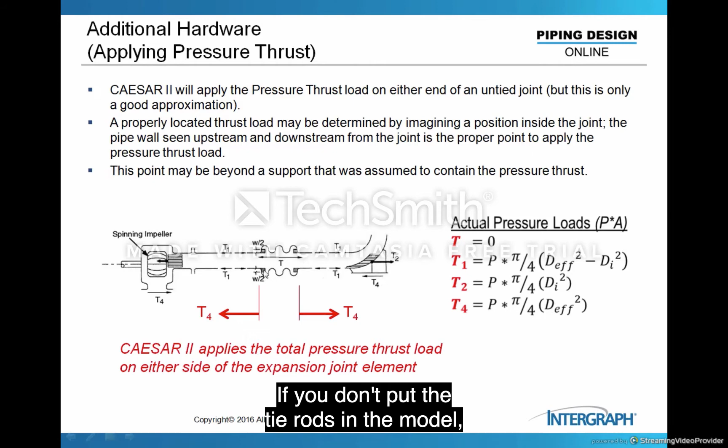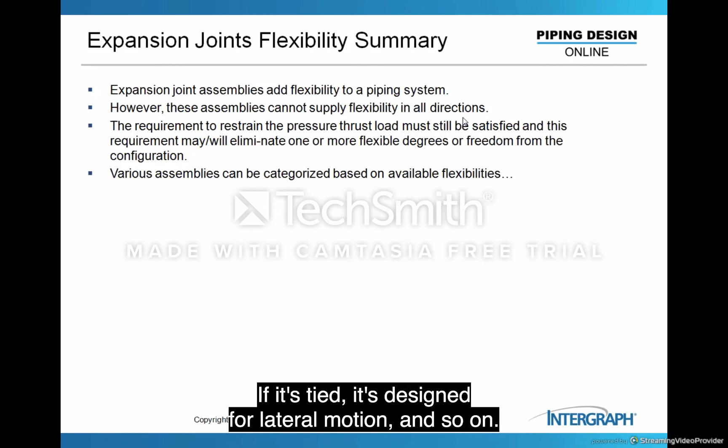Now, just to summarize, these expansion joints are added to your piping system to add flexibility, probably for thermal strain or maybe some anchor motion. Sometimes it's maybe a little bit of alignment issues too, but basically they're used to add flexibility to the piping system. Now, these assemblies do not work in all directions though. You noted earlier that I said that if it's untied, it is designed for axial motion. If it's tied, it's designed for lateral motion, and so on.

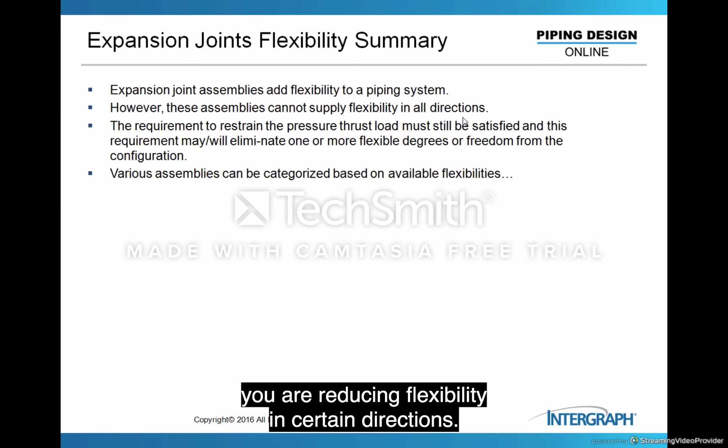So as soon as you start to work with different types of hardware to contain pressure thrust, you are reducing flexibility in certain directions. So let's take a look at those different joints in terms of the flexibility that they add. Well, an untied joint provides axial freedom. However, you will be required to have guides and thrust supports throughout the system to carry the pressure thrust and direct the motion. You could use it for lateral and bending if you had very low pressure.

A tied joint is very compact and stable, but it can only allow lateral deflection, or it's designed for lateral deflection. You can get other out of it, but that's not the design. When you're looking at a hinge joint, your consideration is on the bending term. If you have just one axis open up, it's a single hinge. If you want both axes, it will be a gimbal joint. You will also probably use some guides in this area to make sure you don't push it in the wrong direction.

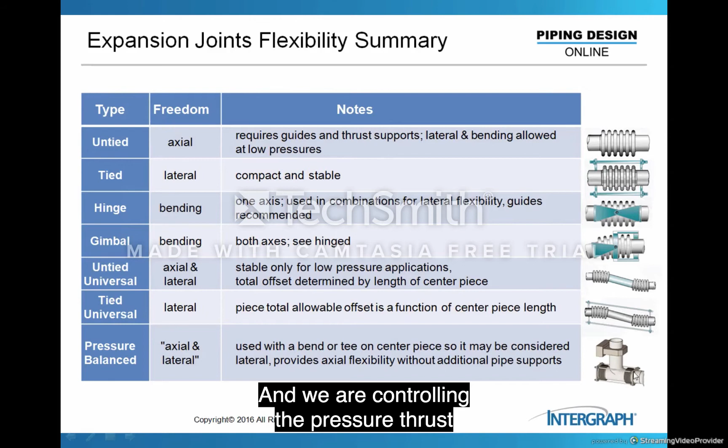Untied universal is used only for very low pressure because these are very unstable joints, but you can get both axial and lateral deflection out of them. On a tied universal joint, now we have the pressure control on it, and the center spool piece will be a multiplier on the lateral offset available out of any one of those joints. And on a pressure balance joint, you're getting some axial and lateral freedom out of that, and we're controlling the pressure thrust by throwing an expansion joint outside the limit of the exiting leg.

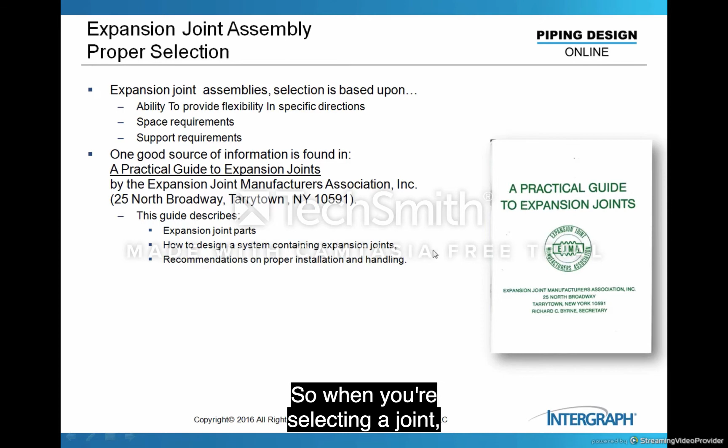Now, if you're going to be using expansion joints, I would suggest you get familiar with the Expansion Joint Manufacturers Association. This is a very small booklet that you can purchase from the Expansion Joint Manufacturers Association. Here's the address if you wish. It'll explain the different parts in an expansion joint and how to design a system with expansion joints and proper installation and handling. So when you're selecting a joint, you want to be able to provide flexibility in specific directions. You'll be also concerned about space requirements for the joint and the support requirements for that joint.

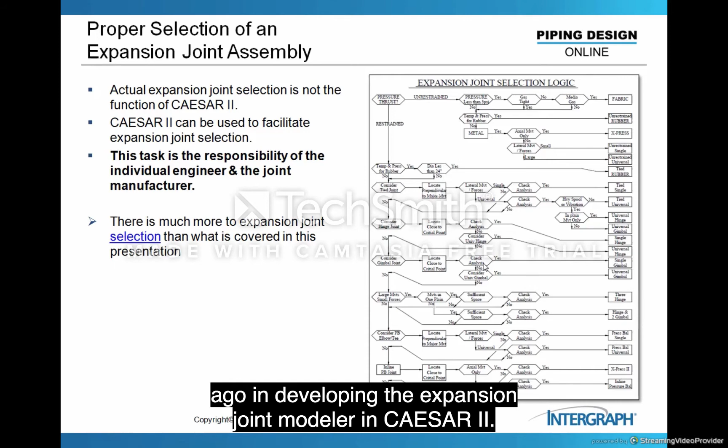This graph here was developed by a gentleman at Senior Flexonics Pathway. Dan Edgar was working with Tony Paulin years ago in developing the expansion joint modeler in CAESAR II. And this was the flow chart that he developed with Tony to do a complete model of an expansion joint. They certainly brought back on some of their requirements here, and it didn't get to this level of detail, but you can see there's all different types of joints here.

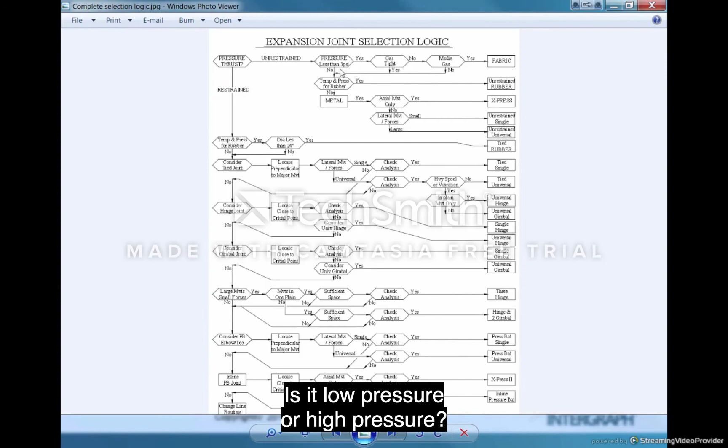And is it restrained or unrestrained? Is it low pressure or high pressure? If it's low pressure, you can get away with fabric or rubber joints. Here's your metal joint.

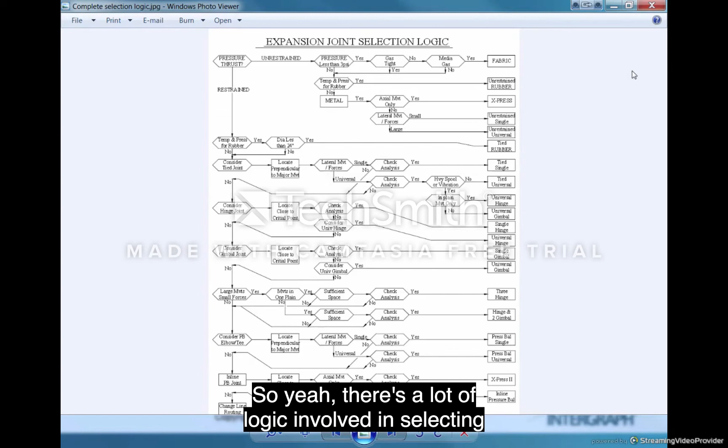Here's your tied joints, hinge joints, universal gimbal. So yeah, there's a lot of logic involved in selecting any sort of these joints. Now, CAESAR II does not select the joint for you. You will select it from a menu if you wish to use the expansion joint modeler.

But basically, you have to either have a catalog in front of you or the modeler in front of you in order to enter the data. Again, I would suggest that you work closely with the manufacturer to build this properly. Now, what about this expansion joint that we wish to put in here?

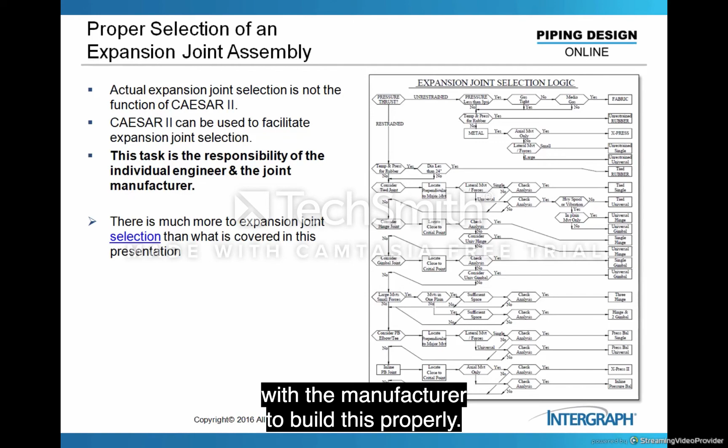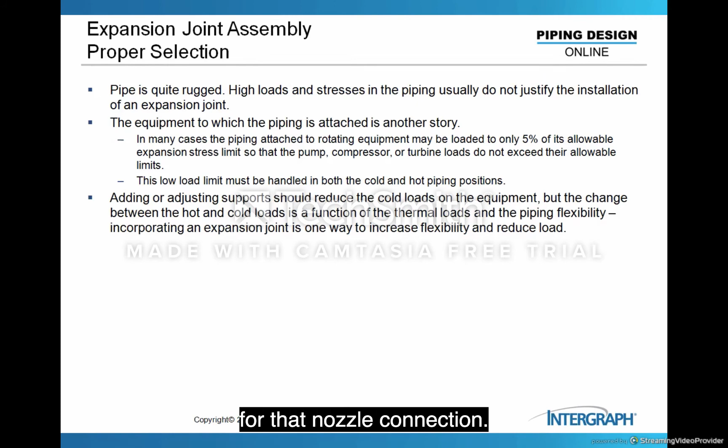The piping system is quite rugged. You can take very high loads and stresses in the piping, and you don't need expansion joints. But as soon as you start to attach to equipment, now the story changes. The pipe is too stiff or too rugged for that nozzle connection. And without perhaps room for an expansion loop, that's where these expansion joints come into play.

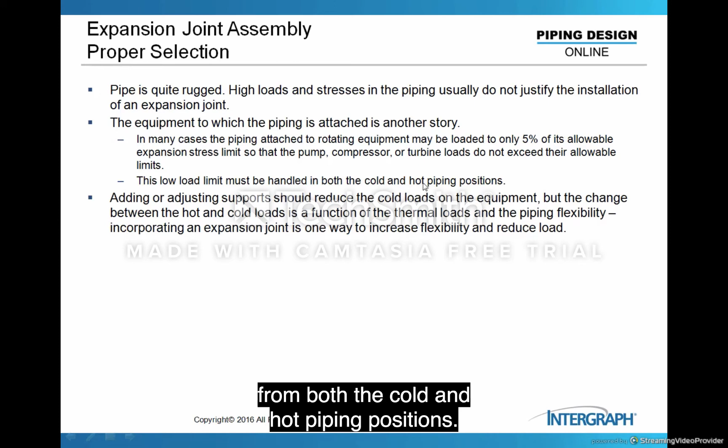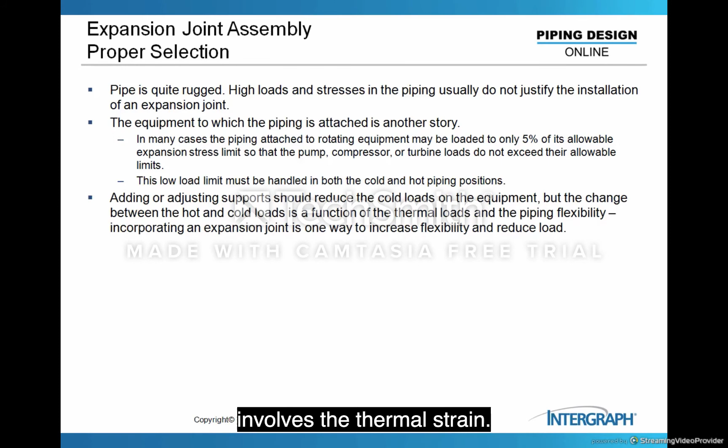So the equipment must carry the load from both the cold and hot piping positions. And we can adjust the cold load by adding different supports to the piping system. But it's the change in load between cold to hot or installed to operating that involves the thermal strain, and now the system stiffness plays a role in the operating load on the equipment. And adding flexibility is one way to reduce the load on that equipment. And an expansion joint can do that for you.

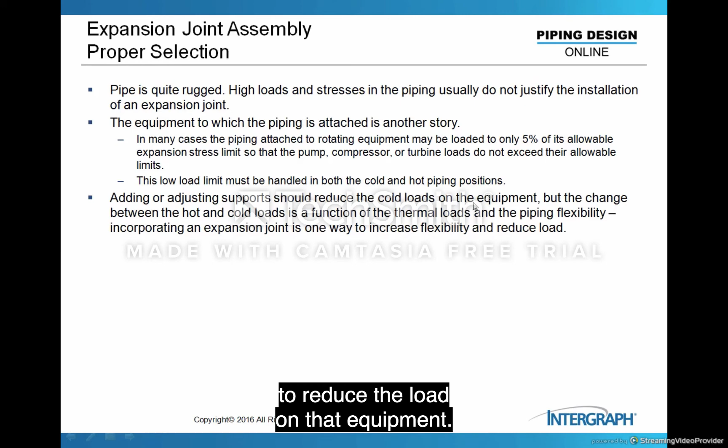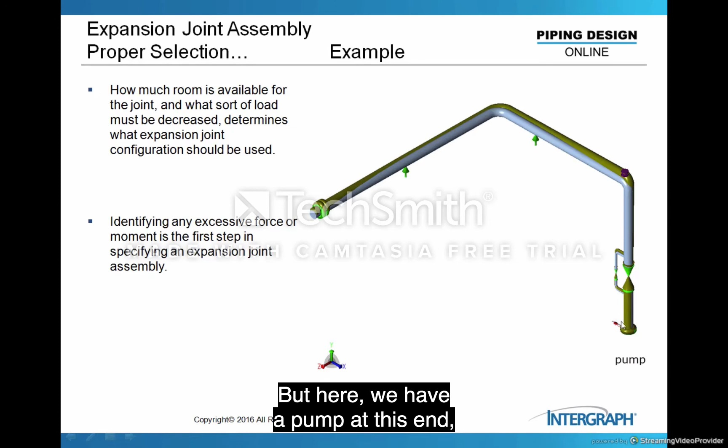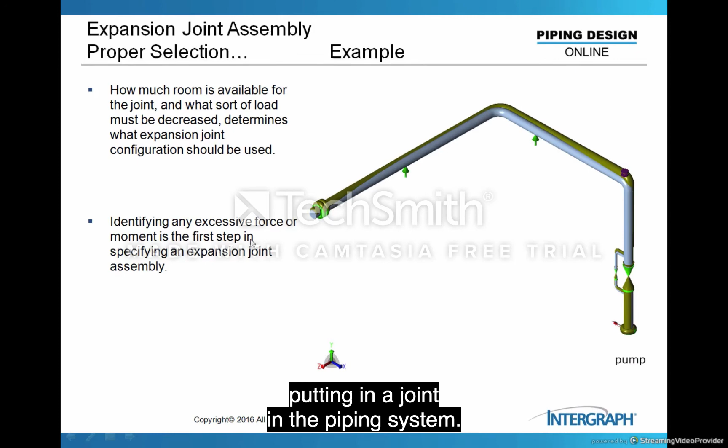Here's an example. Here's a piping system. If you've attended our training classes in the classroom environment, you might be familiar with this model. But here we have a pump at this end going over to a vessel over here. If we have to put in an expansion joint, where would we put it and why? Now, first we have to find out why we're putting in a joint in our piping system. Well, we have to carry some load on this pump.

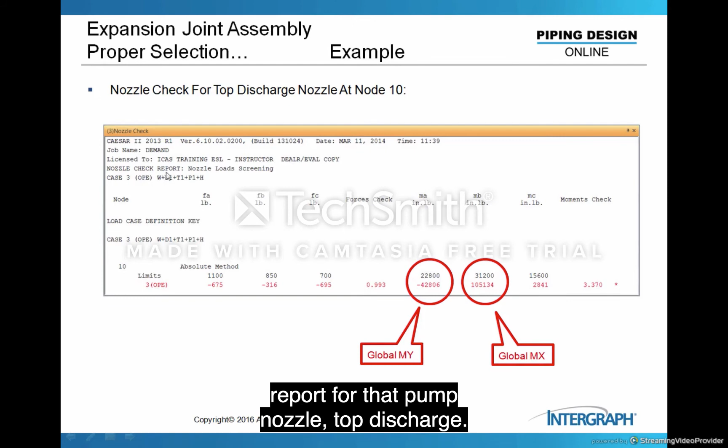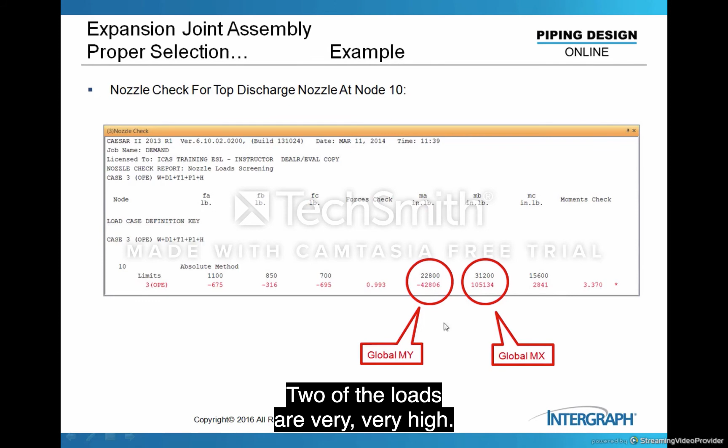And I can run CAESAR II, and if I'm calling this node 10 down here, here's the nozzle check report for that pump nozzle, top discharge, and we see we are over 3 times the API 610 allowable limit. 2 of the loads are very, very high. Both the global MY and global MX bending moments are excessive. So here they are shown. I got this bending moment about the X and this bending moment about the Y-axis. So we're twisting the riser, and we're also pushing this elbow in the negative Z direction, causing the big MX.

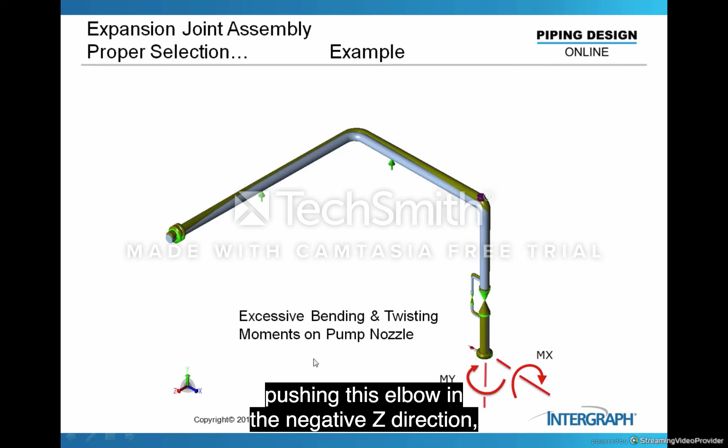So what we have to do is determine which thermal strain is causing that. Is there one thermal strain or 2 thermal strains that are causing these large loads? Well, the one load, this thermal strain, as this pipe gets hot here, we will twist the pipe around the Y-axis, MY, with this long moment arm here, and we'll also roll the whole riser in the negative Z direction, causing the big MX.

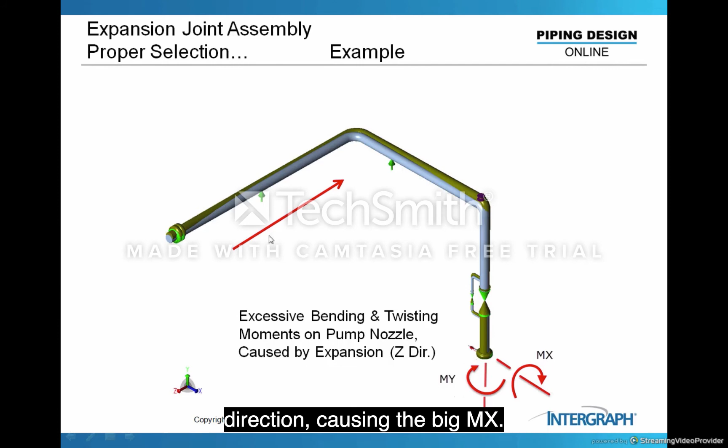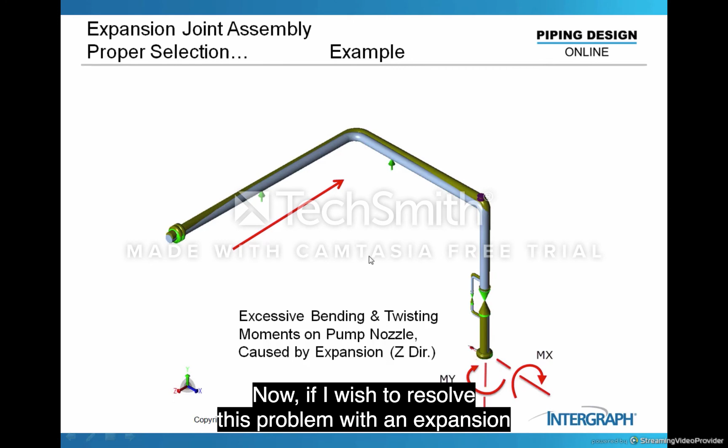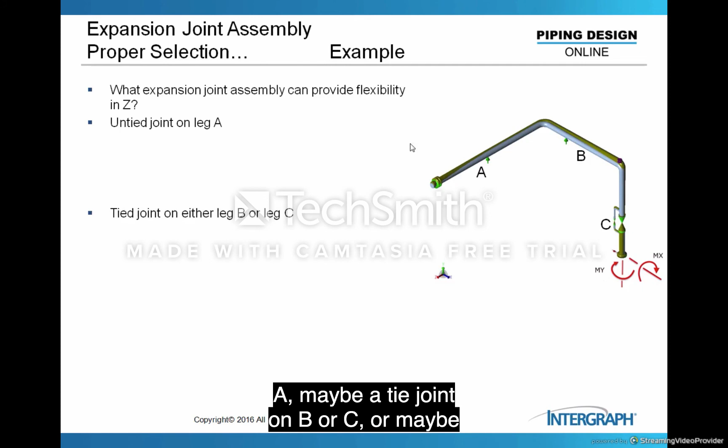So the thermal strain that is causing the majority of these loads down here is the growth in the Z direction. Now, if I wish to resolve this problem with an expansion joint, which joint would I use and where would I place it? So again, I want to add flexibility in the Z direction to take care of that thermal strain that I have on leg A. Well, I can put an untied joint on leg A, maybe a tied joint on B or C, or maybe some hinge points or maybe a swing joint on leg B.

I'm going to leave the hinges to the manufacturer to discuss. Again, with hinges, there are larger rotations, and the pipe stress program is using F equals Kx. If you have large rotation, we cannot maintain that geometric constraint of that rotation. I'm going to focus on these 2 here, the untied joint and the tied joint.

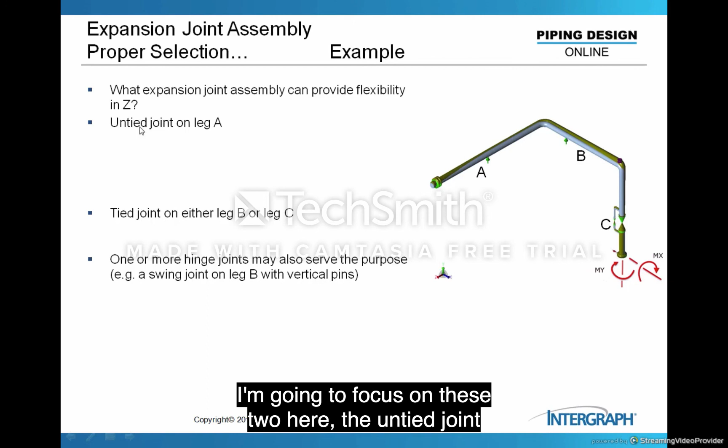Now, if I wish to put an untied joint, I have to control the pressure thrust. So an untied joint would go on leg A because that's axial growth then of that untied joint. But then I'd have to put guides on this run, and if I put guides here, the thermal strain here on leg B would overload the nozzle about the Z-axis. So that extra hardware that I have to install in here pretty much eliminates it as a feasible solution for our problem down here. If I put a tied joint in my model, I could put it on B or C.

But if I put it on leg C, I'm taking advantage of the flexibility in both the Z direction and the X direction, the 2 directions perpendicular to the axis of the pipe. So I would have to say that a tied joint on leg C, right off of the pump, might be the best location for a tied expansion joint to solve both of these bending moment problems. So yeah, I'm going to go with a tied joint on the riser.

In our next video, we'll take a look at how we select the right joint from the catalog. We'll work with this system here and calculate the demand on the joint and then pick a joint from the catalog.